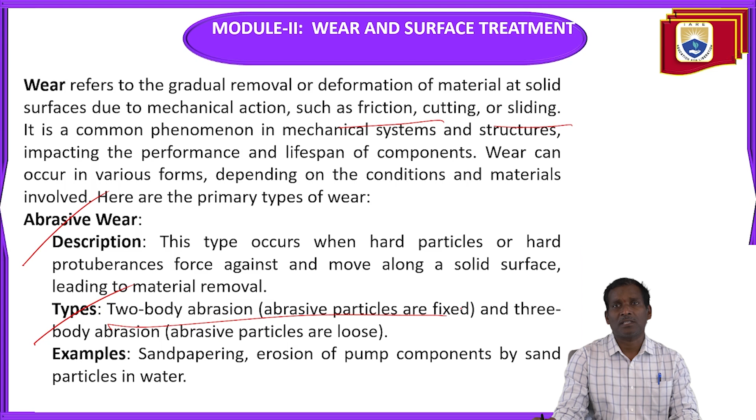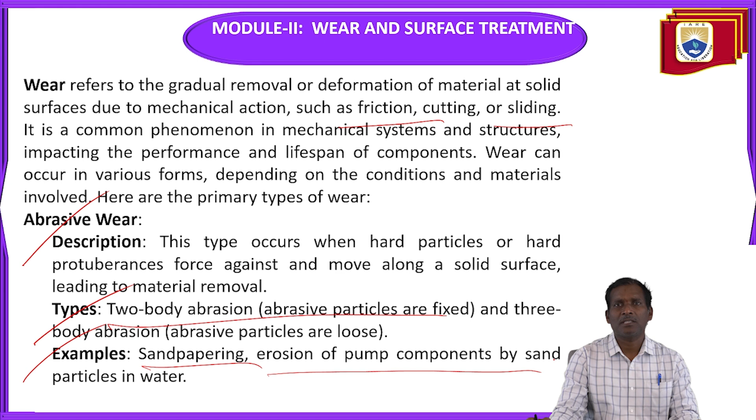Abrasive wear occurs when hard particles or hard protuberances force against and move along a solid surface, leading to material removal. Generally, wear refers to the gradual removal or deformation of material at solid surfaces. The types are two body abrasion, where abrasive particles are fixed, and three body abrasion, where abrasive particles are loose. Examples include sandpapering and erosion of pump components by sand particles in water.

Next, adhesive wear. After abrasive wear, adhesive wear is caused by the formation and breaking of adhesive junctions, or cold welds, between two sliding surfaces. The mechanism is that when two surfaces slide over each other, material transfers from one surface to another due to adhesion property. Examples include galling, scuffing, and fretting. Generally, this type of wear occurs due to the breaking of adhesive junctions between two sliding surfaces.

Corrosive wear is wear accelerated by chemical or electrochemical reaction with the environment, leading to material removal. The mechanism is that oxidation or other chemical reactions weaken the material, which is then removed by mechanical action. Examples include rust formation on steel surfaces and degradation of metal surfaces in acidic environments.

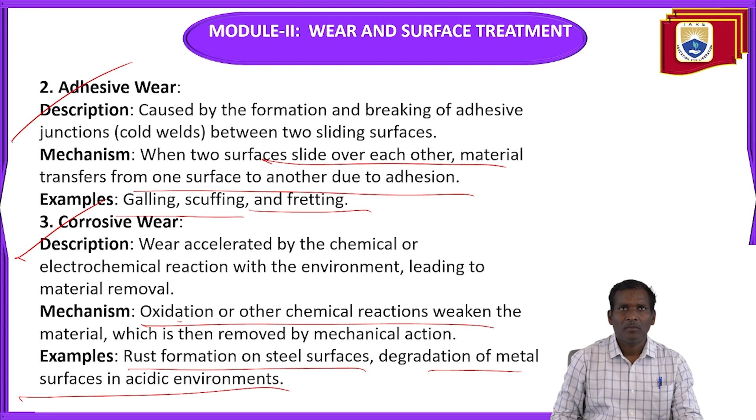Next, fatigue wear. This type of wear occurs whenever a component is subjected to repeated loading and unloading cycles, leading to the formation of cracks and subsequent material removal. The mechanism is surface fatigue due to cyclic stresses, resulting in pitting, spalling, or cracking. Examples include rolling contact fatigue in bearings and gear tooth fatigue.

Erosive wear is caused by the impact of solid or liquid particles against a surface. The mechanism is that particles hit the surface with high velocity; these particles may be solid or liquid, impacting against a surface. Due to this impact force, some material is eroded, removed by cutting or deformation. Examples include erosion of turbine blades and wear in pipelines transporting slurry.

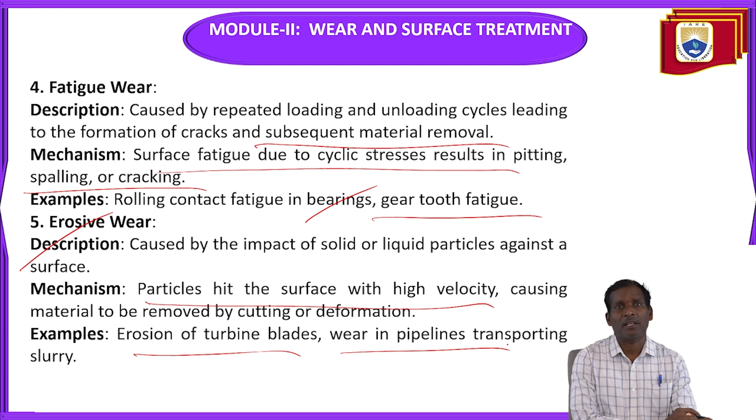Fretting wear occurs due to small amplitude oscillatory motion between two contact surfaces. The mechanism is that repetitive motion causes surface degradation and the formation of wear particles. Examples include fretting in bolted joints and contact surfaces in electrical connectors.

Next, cavitation wear, caused by the formation and collapse of vapor bubbles in a liquid near a solid surface. The mechanism is that the implosion of vapor bubbles generates shock waves that remove material from the surface. This causes damage to ship propellers, pump impellers, and hydraulic turbines.

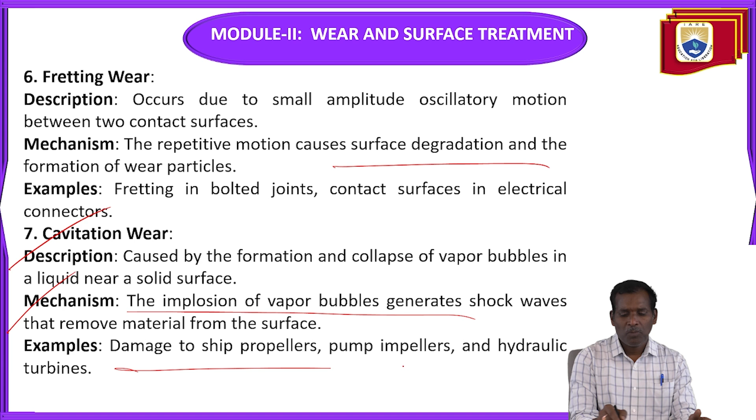Next, surface fatigue wear, a very important topic. Surface fatigue wear occurs due to repeated cyclic stresses acting on the surface of a material, leading to the initiation and propagation of cracks. Over time, these cracks grow and intersect, causing material fragments to detach from the surface. This type of wear is commonly seen in rolling contact situations, such as in bearings, gears, and cam follower systems.

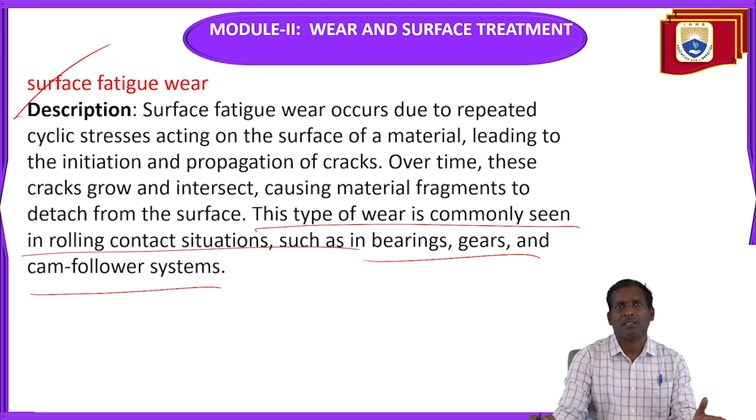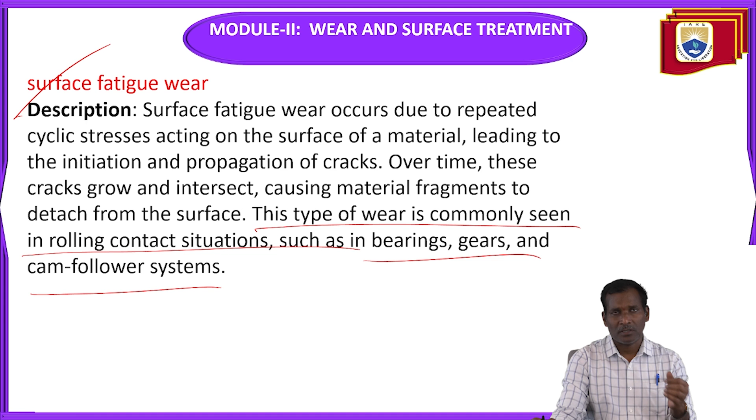This occurs due to repeated cyclic stresses acting on the surface of a material—that is surface fatigue wear, seen in bearings, gears, and cam follower systems. The mechanism: micro cracks form on the surface due to cyclic loading (initiation); these cracks grow with continued stress cycles (propagation); eventually the cracks intersect and lead to detachment of material particles, resulting in pitting, spalling, or flaking of the surface. Examples: pitting on gear teeth, spalling in ball and roller bearings, cracking in railroad tracks.

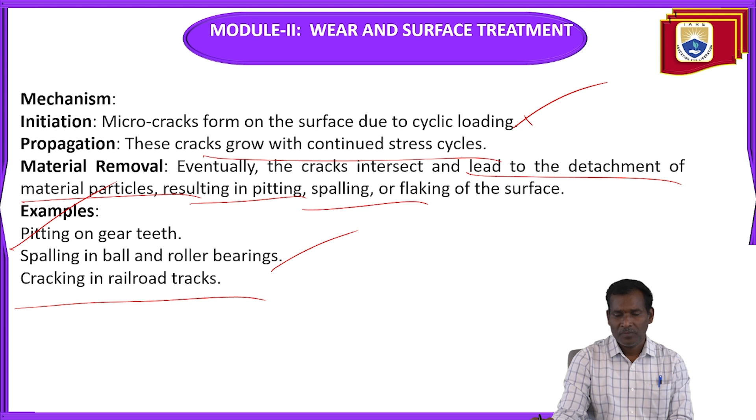Next, control of surface fatigue wear. One method is material selection, which is very important, along with surface engineering. For material selection, use materials with high fatigue strength, toughness, and hardness. They also employ surface treatments like carburizing, nitriding, or induction hardening to increase surface hardness and resistance to crack initiation.

So that's why the selection of material is very important in a design. If you have selected a good material for a good proper application, you can control surface fatigue wear, you can minimize it. That's why you should know about this surface fatigue wear.

Surface engineering applies coatings such as chrome, nickel, or tungsten carbide to improve surface hardness and reduce wear. Use shot peening or laser peening to introduce compressive residual stresses on the surface, which helps resist crack initiation and propagation.

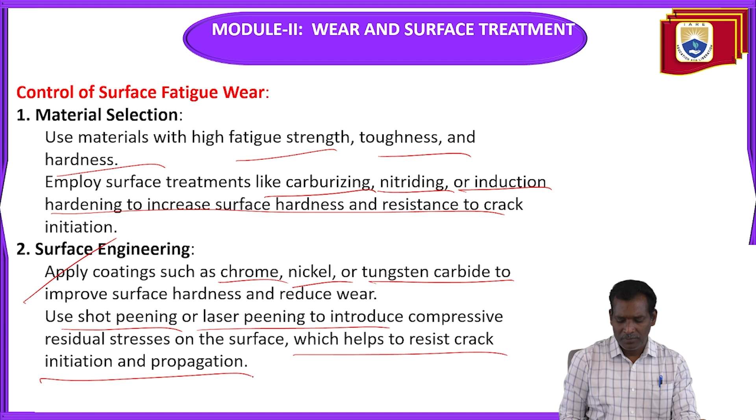Next, lubrication. Ensure proper lubrication to reduce friction and wear. Use lubricants with additives that form protective films, reducing direct metal to metal contact and distributing loads more evenly.

So the design improvements optimize component design to distribute loads more evenly and avoid stress concentrations. The stress concentration topic is very important in machine design. For design improvements, to control failures, you should know about stress concentration and how to avoid it.

Use larger radii at corners and fillets to reduce stress concentration. Suppose the component has a uniform cross section - there is no problem, no stress concentration while carrying load or distributing stress lines from one end to the other. But suppose the object has a sharp edge like this - there is a problem. Stress concentration will occur at this area. You should avoid this type of edge, and use large radius fillets instead.

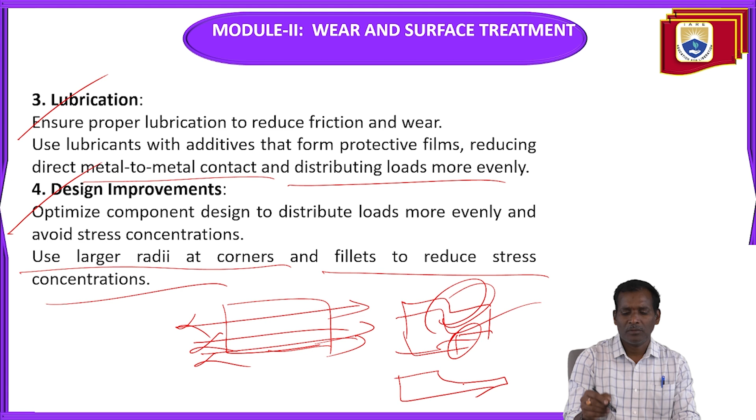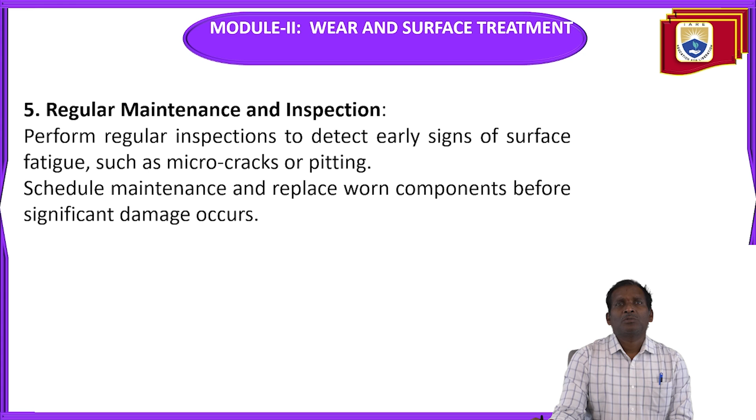So that is design improvements. Regular maintenance and inspection: perform regular inspection to detect early signs of surface fatigue such as micro cracks. Schedule maintenance and replace worn components before significant damage occurs. Next, control operating conditions - avoid excessive loads and speeds that increase stress on the surface, and implement proper alignment and balance in rotating machinery to reduce uneven loading.

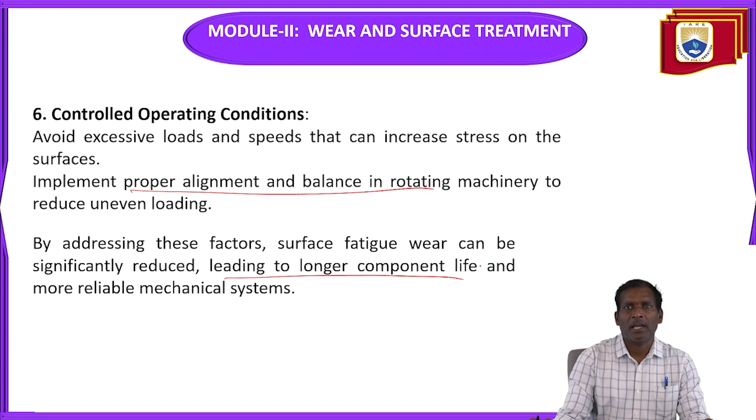By addressing these factors, surface fatigue wear can be significantly reduced, leading to longer component life and more reliable mechanical systems.

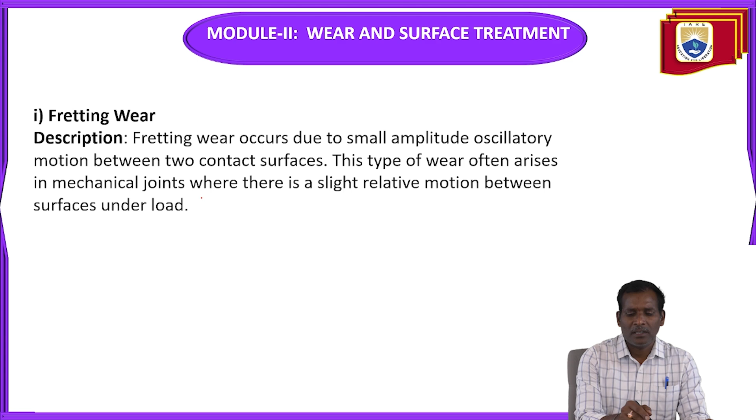Next, fretting wear. Fretting wear occurs due to small amplitude oscillatory motion between two contact surfaces. This type of wear often arises in mechanical joints where there is a slight relative motion between surfaces under load.

So the mechanism: small, repetitive movements cause surface degradation. This leads to formation of wear particles and potential oxidation. It is common in bolted joints, spline shafts, and electrical connectors.

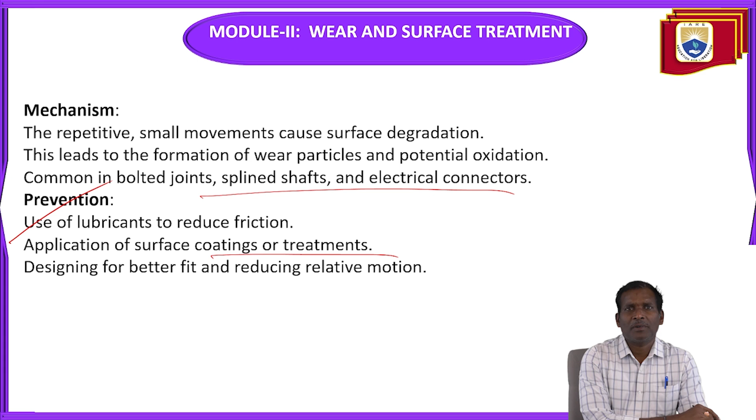Prevention includes use of lubricants to reduce friction, application of surface coatings or treatments, and designing for better fit to reduce relative motion.

Surface fatigue wear is caused by repeated cyclic stresses on the material surface - already discussed in previous slides. The mechanism involves micro cracks due to cyclic loading.

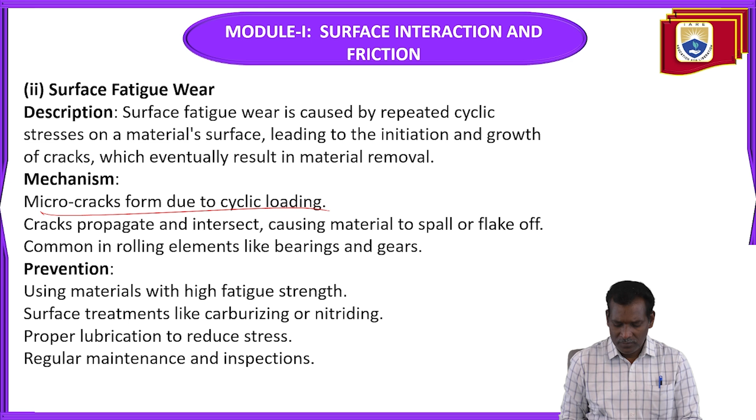Next, erosion wear and percussion wear. This is where repetitive impact or hammering actions on a material lead to deformation, material displacement, and eventual wear. When repetitive impact or hammering actions are subjected to a material, percussion wear occurs.

Due to this wear, it leads to deformation and material displacement. The mechanism: repeated impact causes surface deformation, and the material may crack and spall off due to constant hammering. This is common in tools like hammers and anvils, and in machinery subject to repetitive striking actions.

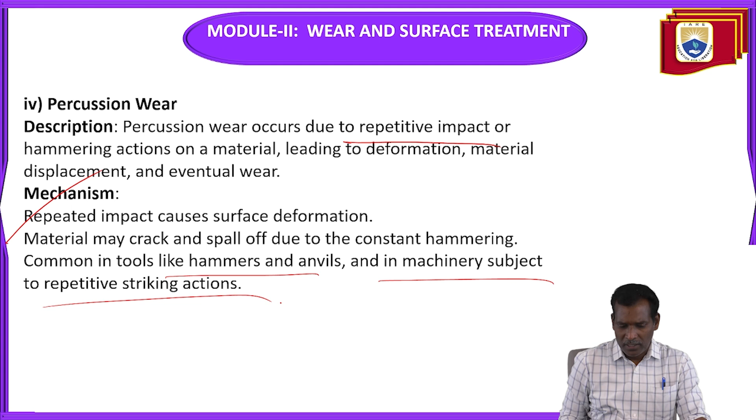Prevention: using tough impact resistant materials, applying surface hardening treatments, properly designing components to distribute impact forces evenly, and regular maintenance to identify and mitigate early signs of wear. These brief notes highlight the key aspects of each type of wear and common strategies for their prevention and control.

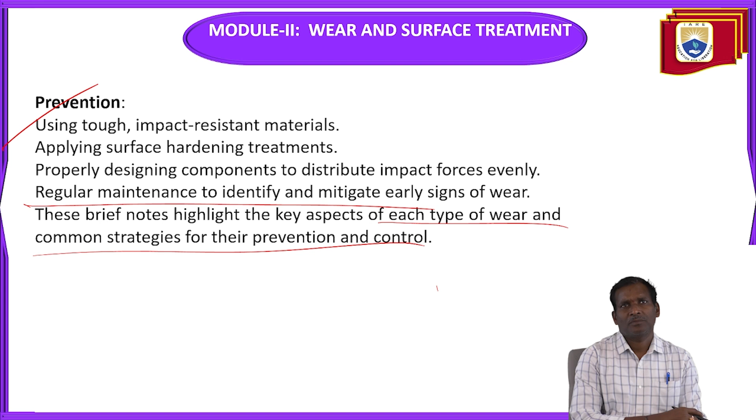Next, Archard's theory of adhesive wear. This is a widely recognized model that describes adhesive wear, where wear occurs due to the formation and breaking of adhesive junctions between two sliding surfaces - cold junctions, you can say - the adhesive wear will occur.

The basic principle is adhesive junctions: when two surfaces come into contact, microscopic high points on each surface interact and may form adhesive bonds. During relative motion, these adhesive bonds can shear, causing material transfer or wear particles to be generated.

Next, wear volume. Archard's wear equation relates the volume of material worn away to the applied load, sliding distance, hardness of the softer material, and a dimensionless wear coefficient K. So you can get V equals K times L times D, divided by H.

Next, key components: the wear coefficient is a dimensionless factor that accounts for the probability of junction formation and the effectiveness of their shear.

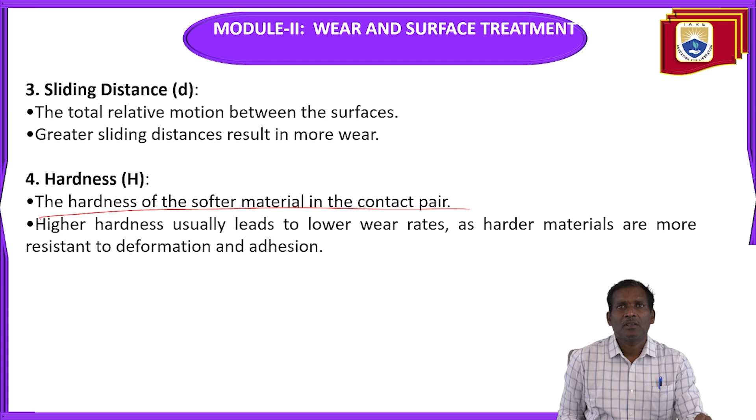So you can see here, KLD by H. K is the wear coefficient, L is the applied load, and D is the sliding distance.

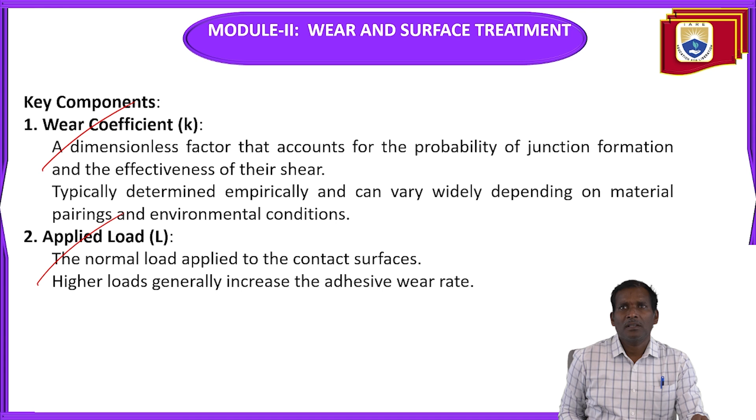The wear coefficient assumptions: wear is proportional to the applied load and sliding distance. It also assumes that the wear debris is formed mainly due to the adhesive forces between the contact surfaces.

Next, applications. Archard's theory is used to predict wear in various mechanical systems such as bearings, gears, and sliding contacts. It helps in selecting materials and designing components to minimize wear and extend service life.

You can improve the service life by using this Archard's theory. In various mechanical systems, you can predict wear in sliding contact bearings, rolling contact bearings, and gears.

Different types of gears are there, like worm gears and worm wheels. All these components can be frequently subjected to wear. You can predict the wear using Archard's theory, which helps in selecting materials and designing components to minimize wear and extend service life.

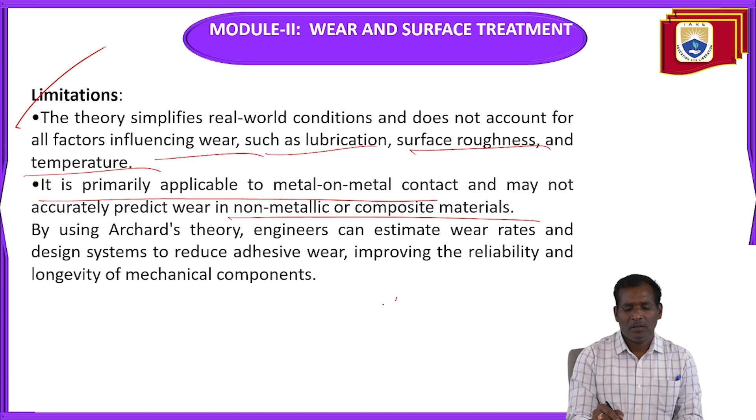Example: gear wheels, gears and bearings - in these there is metal on metal contact. That's why this Archard's theory is useful and applicable to this type of application only.

So that is one limitation: it is not suitable for non-metallic or composite materials. You can use this theory, but you can't get accurate values, so you can't accurately predict the wear.

By using this Archard's theory, engineers can estimate wear rates. Before designing a component or product, various steps are there.

First, you need to identify the problem and then select the material, and you should know the properties before selection of materials. Every engineer should know about the mechanical, thermal, and electrical properties, and then only can select the proper material for proper application.

So before designing, the selection of material is very, very important. We have already seen the materials topic - engineering materials, different types of materials, and properties. By using this Archard's theory, particularly related to wear and surface treatment,

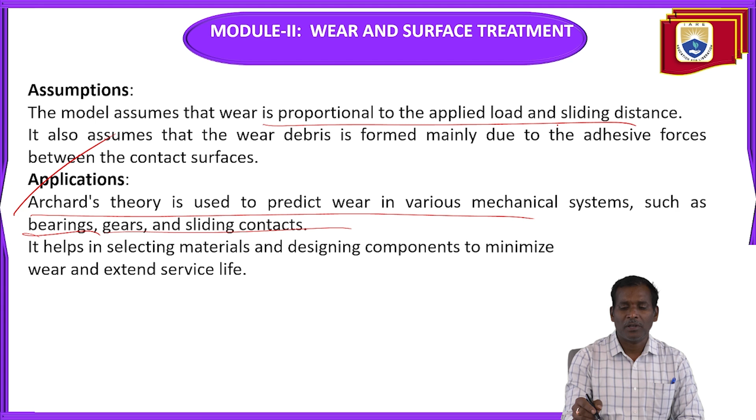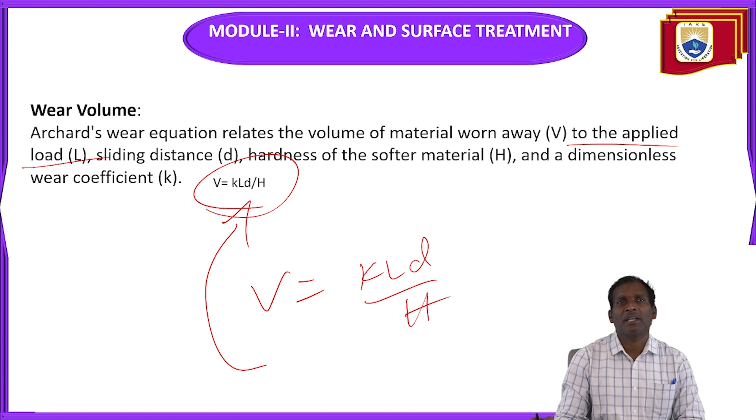Wear is proportional to applied load L and distance D. You can see this in the equation KLD by H. H is the hardness of the material, K is the dimensionless wear coefficient. So you can write this equation as K, L, D by H, proportional to L into D.

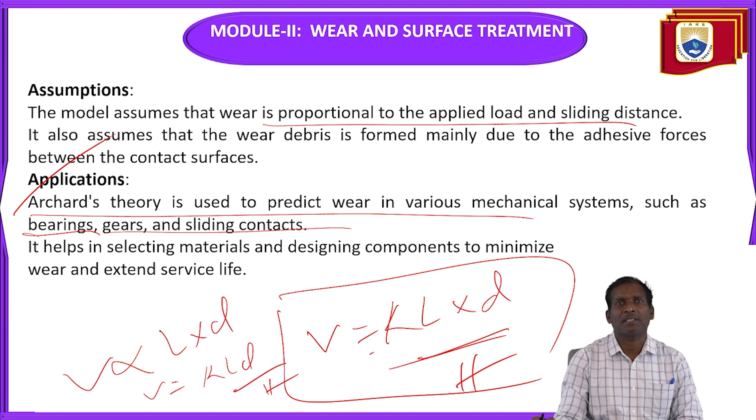This theory helps in selecting materials and designing components to minimize wear and extend service life. The main aim of Archard's wear volume theory is to minimize the wear and predict the wear.

This is the theory of adhesive wear, where the components are breaking - between the two surfaces, adhesive junctions occur between two sliding surfaces. These are nothing but cold junctions.